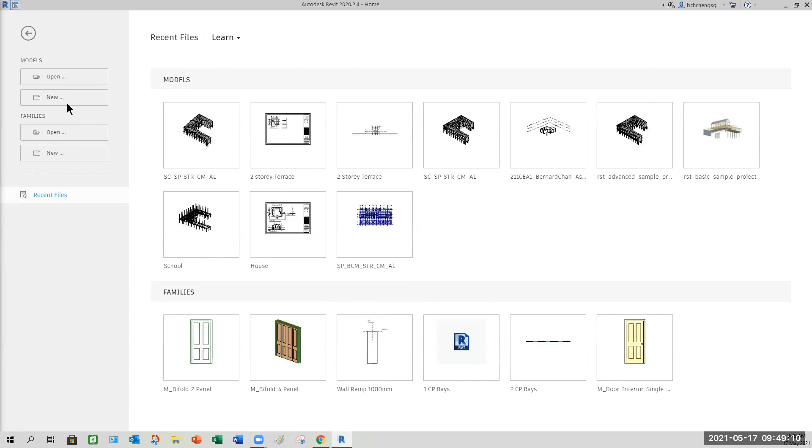So let me minimize here. I will open up our session, which is where is our file? Oh, I haven't used my notebook before, that was in school. Okay, so open. So my document should be your class session, BC Academy.

Students. HVAC, right? Yeah, so mechanical, HVAC, this one. Remember, this is all your backup files.

So if not required, try to delete away to free up occupied space. You guys can actually configure to leave like one or two backups, or set it to one. I'll show you later on.

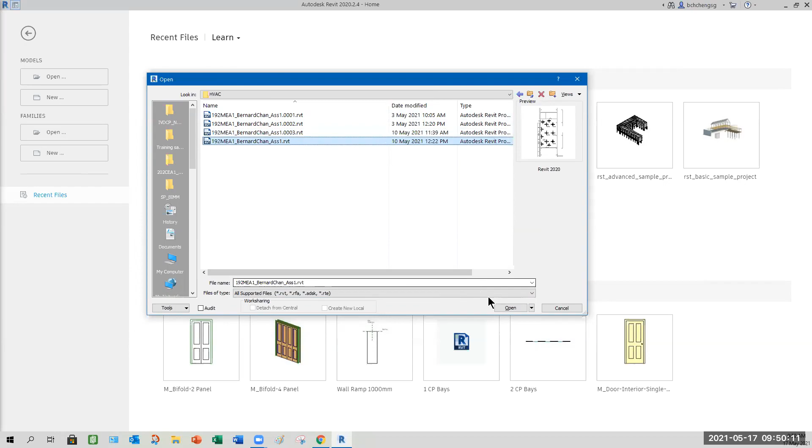Because on school PC, once you set it, when you go away, you still got to reconfigure it. A bit troublesome. Now you guys are using your laptop, so maybe I just do a quick revision on how you can configure Revit on your laptop.

A quick one, add the option here. Since we are using laptop, no need to set all those reminders, you can turn them off if you guys still remember. Then your worksharing update frequency, from more frequent set it to less, that means manual. So at least your Revit will perform faster.

Next, your view option. Remember, since we are doing mechanical now, your view discipline I will change to mechanical. Always remember that, right?

User interface - if you're still not used to the function, in a sense that you're not sure where's the location, you may want to change the tooltip assistant to high, so that at least the response is a bit faster for Revit.

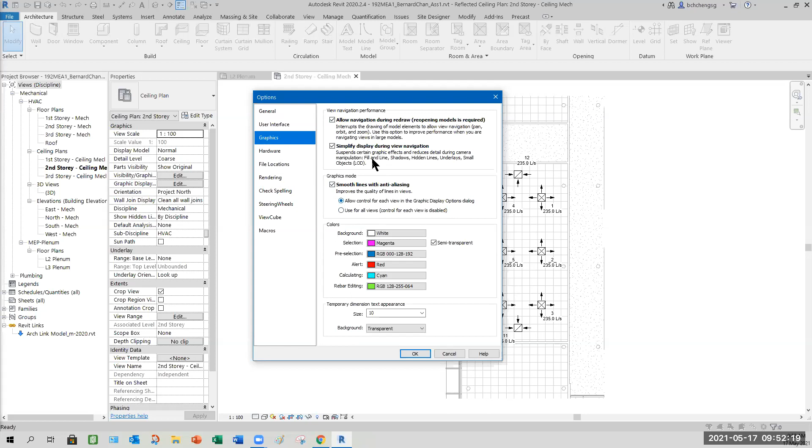So far, graphics portion here, you can change the color, which is this part. As I always like to use when I select an object, this is magenta color, and for pre-selection, you may want to change something, maybe this blue is the same. Okay, this blue, let's say I want it.

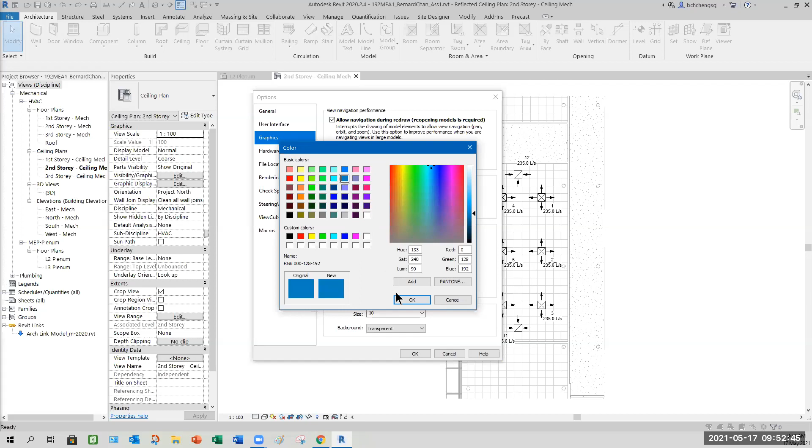The rest, these two are for rebar, which is structural, you don't need it, so don't care. Your temporary dimension, set it to 10 will do. Hardware is the graphic card area, so don't bother.

Now, file location - I believe you have all your libraries required, right? If you guys don't have, I can upload to the Google Classroom, then you guys can download. At least we have a communication platform over there, which is good for Zoom class.

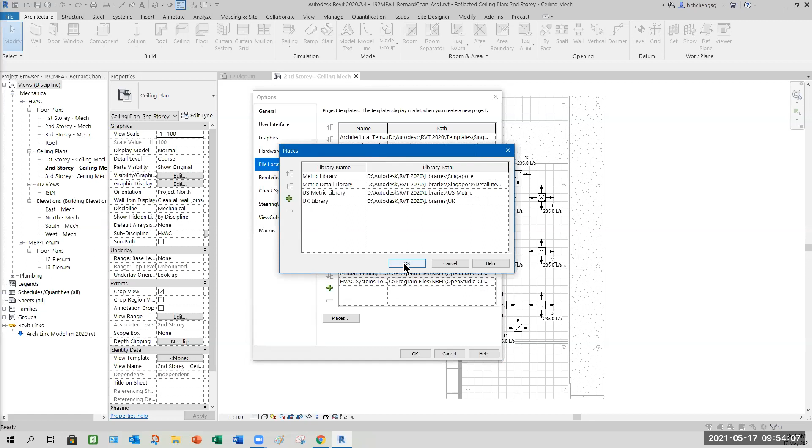So far, so good. Okay, so at least we have a proper setup. Then we can start.

Last lesson, where did we stop? I think we have finished this area, right? Which is the next one, the plenum level, L2.

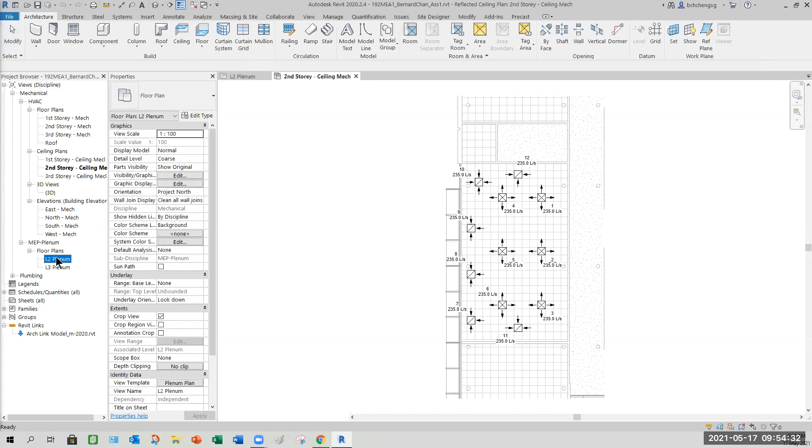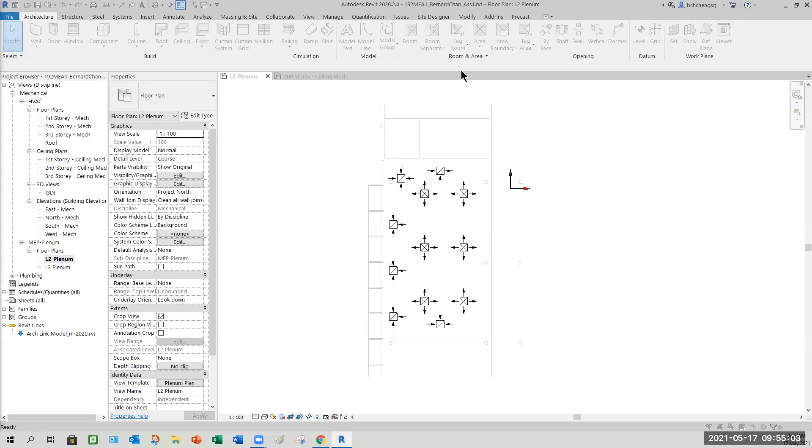So you can see 2020 has this thing on. This is actually known as the internal origin to origin. You guys can turn it off — I don't know why it's on, very weird. Maybe because in my lessons I turn it on and off quite often, so could be because of that. Okay, this one is under the side.

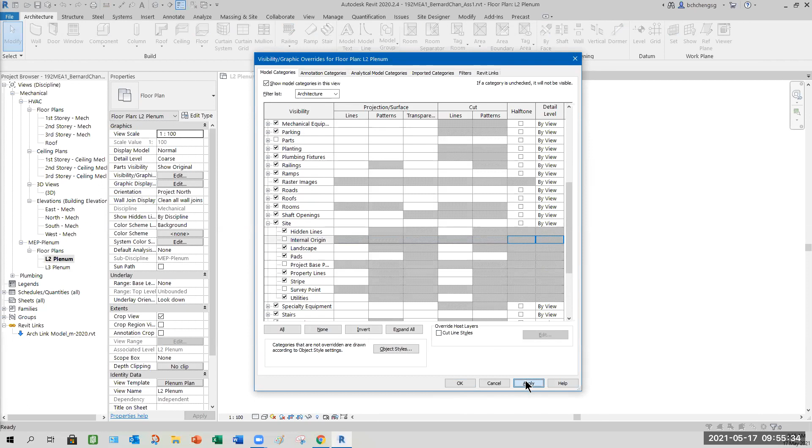Okay, before we start, I just want to double check all pins. Good, they are pinned. Okay.

Next thing I would like to add is a section view of our component here at plenum level. So how are we going to add the section tool? It's here — section. Or you can go to the View tab and look for section.

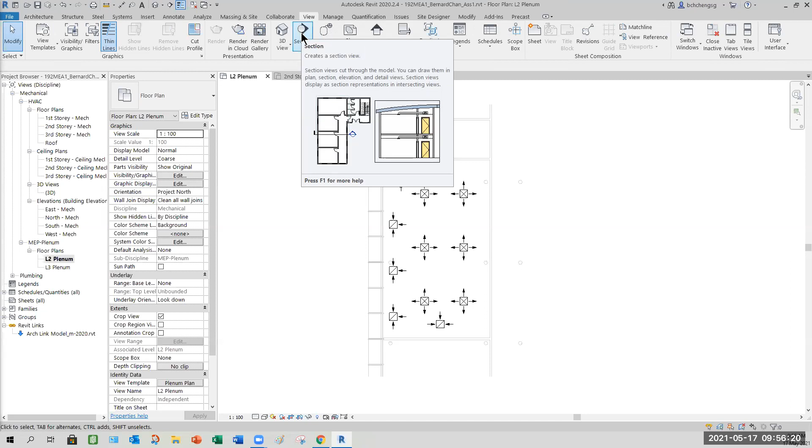The purpose of having a section is to check when I later add in the AHU, the air handling unit, or as you call it in school, the fan coil system, or fan handling unit.

I don't want it to sit on the ground — it's supposed to be mounted on the ceiling. But because when we insert it, it's actually sitting on the plenum level.

So from there we can do some measurement and set this distance. What happened to my throat, it keeps disturbing me. Okay, so — section.

So look carefully, select from not outside — outside you see the facade — it's somewhere inside here. Now pick a point.

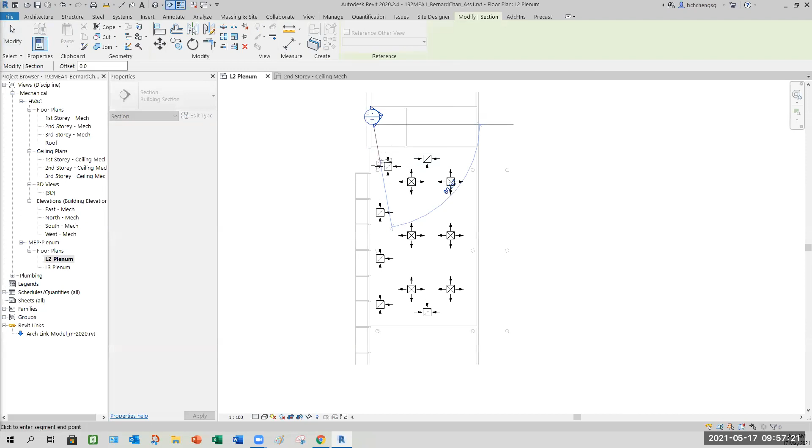You drag downward like this. Then you adjust the width of your cutting view, and also the clipping depth.

The depth here — not outside, but inside, closest to the wall. So it should look like this. Can you see?

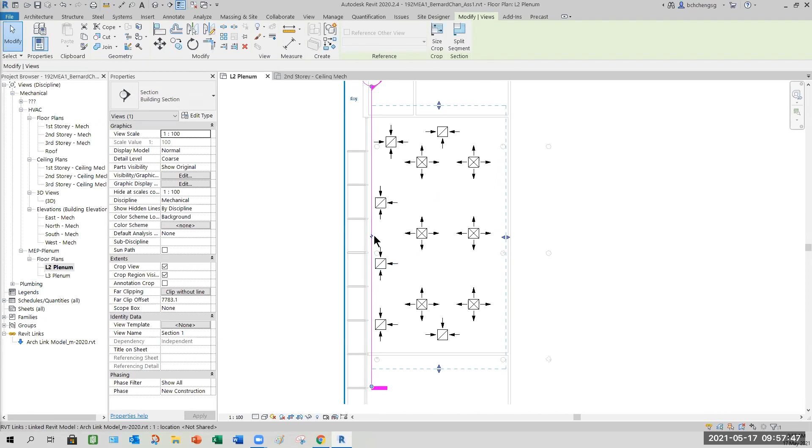If you feel that this line is too long and blocking you, worried it looks like some foreign object, turn it off — you can drag this shorter, so at least it looks cleaner that way. Like that, can?

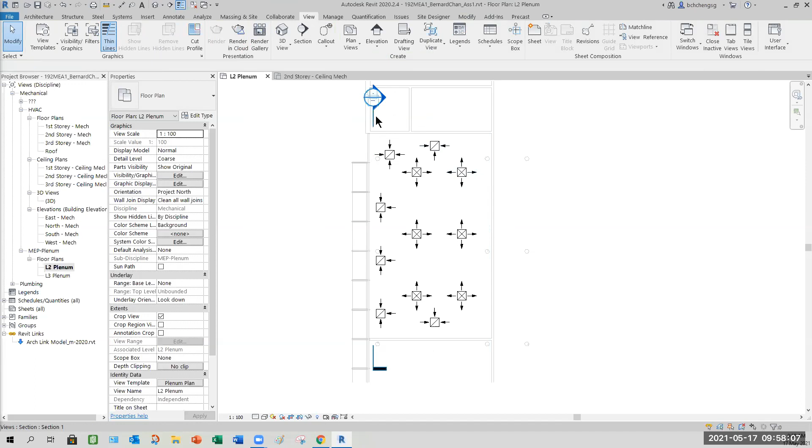I think I'll turn off my light here — it's very warm.

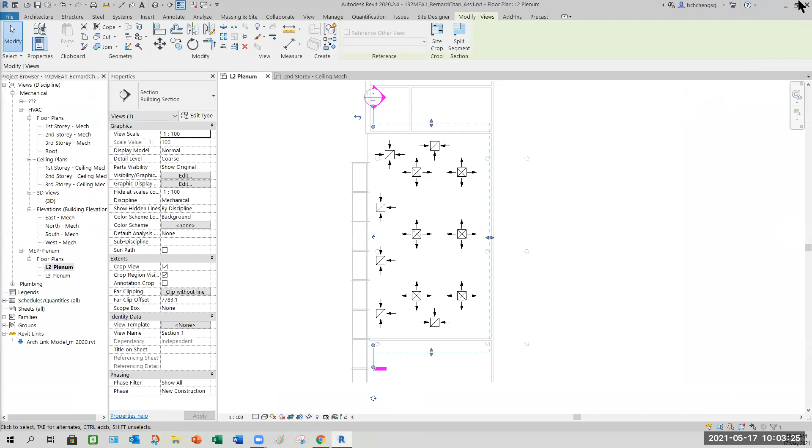Okay, let me minimize my screen. When you guys install software, I believe in Revit here — give me a minute, let me get my things out. You should see this software, see it? It's called Autodesk Desktop.

Then there is something on the licensing and so on. Because right now I'm using 2020 and 2022.

So it only updates, or you can only see, the latest version. If not, normally there's something on the licensing issue that you need to update and repair.

So if yours is an original version, then it should not be an issue. I mean, sorry — not the original, the educational version. Then there's no big problem; otherwise there's a bit of an issue. Okay, yeah, so take note of that.

So maybe later you want to take a look into it and see how. Okay, yeah, let's go back here.

So remember, once we create the plan section view, you'll notice question marks appear — it looks like this, because the system doesn't know where to place your section view. So you need to change the sub-discipline.

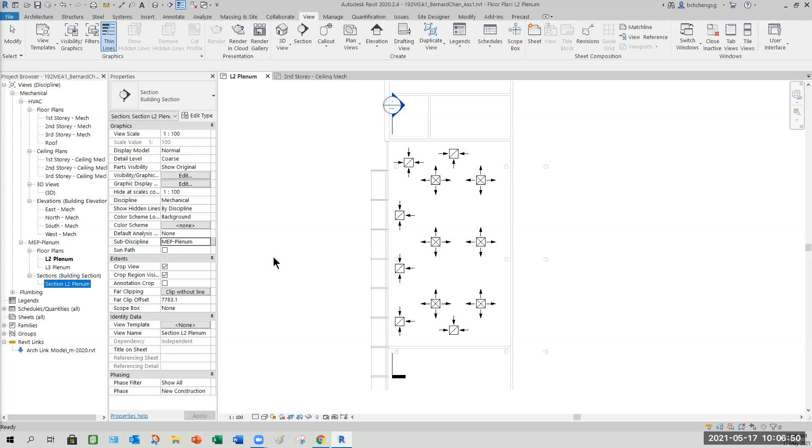How's it? How good? Yes, sir. Okay, so

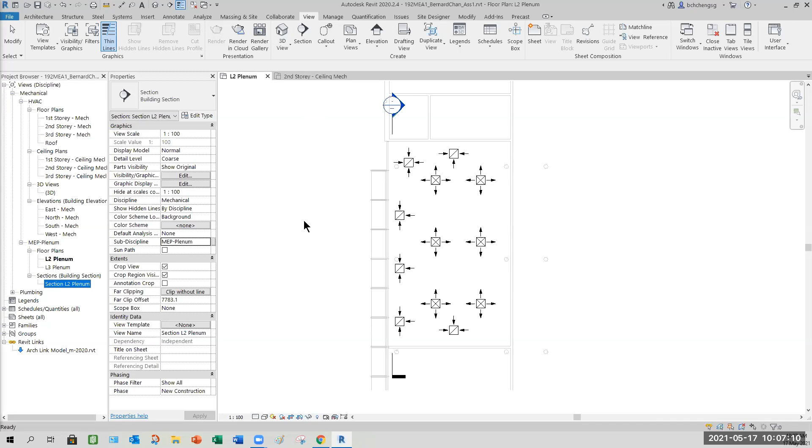The view here, after you have that, remember, section view. There's 3 different ways to open up your section view. First, you can double click at the view name itself. It will launch like this. This is how it will look like.

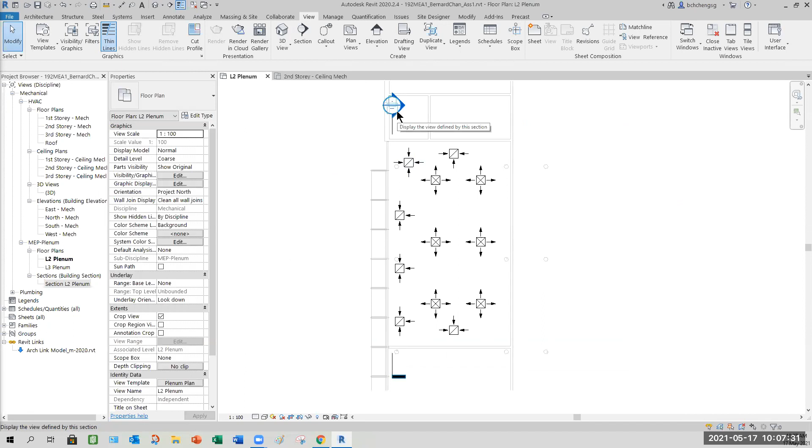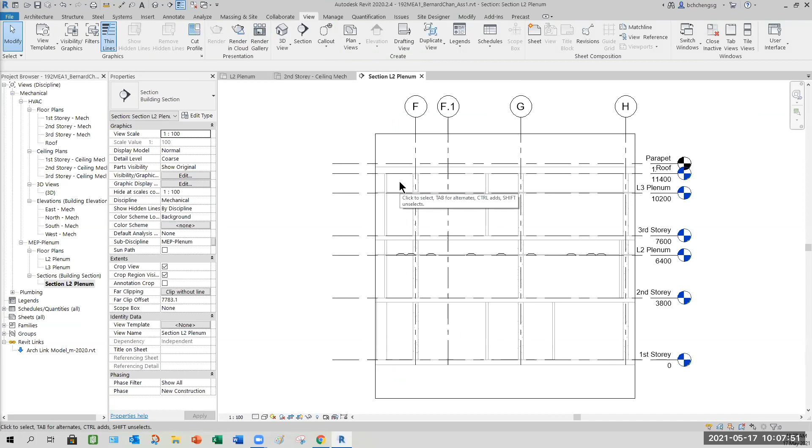Second, you can point at the bubble tag here, double click, and it will launch. The third, you select the line section, right click, and say go to view. Then it opens up. So these are the 3 different ways to go into your section view.

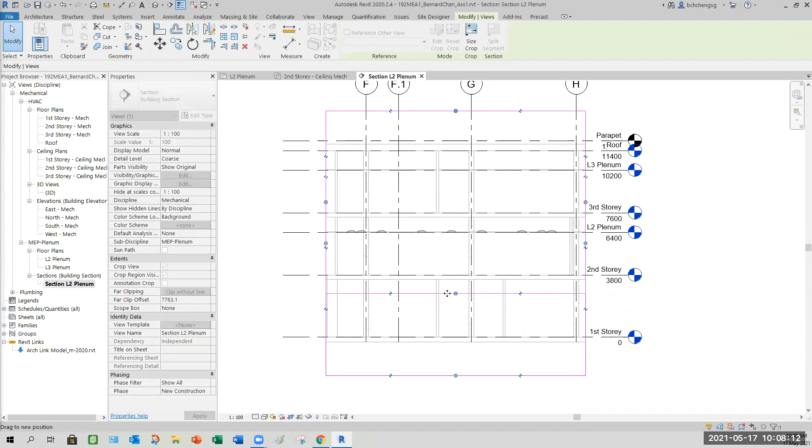Now, since we are here and we are doing only on level 2, you may want to adjust your view to see only level 2 like that. And of course, a lot of things will appear which you may want to hide, for instance, the grid line and your level. So if I go to VG, temporarily I don't want to see them - that means your own grid line and the link Archi grid line and level.

You can simply go to annotation category, then you turn off the view - grids and level, these 2.

Can? Can, sir. Vina, okay. Kairu, you guys are a bit too quiet. Yes, sir. Hopefully can catch up.

Actually, on Zoom you feel like it's more personal teaching because you guys are looking at my screen straight away. Yeah, not like in school face to face, you're looking at the projector. Agree? Yep.

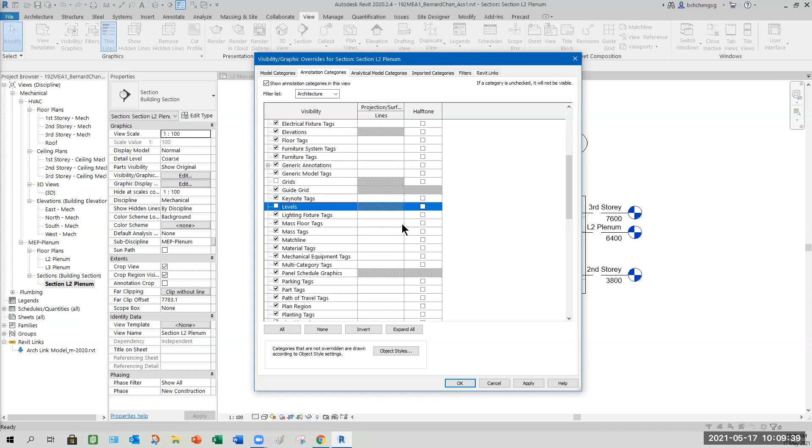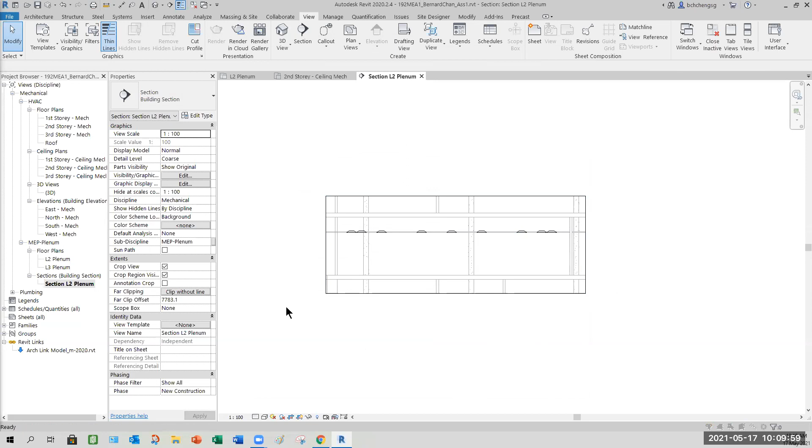Apply. Okay, you see that? Disappear. But of course, without the level, looks confusing. So maybe level I will still turn on - looks quite weird, no grid is still okay, but no level is a bit funny. Let me enable my level back.

Yeah, like this. Okay, but I will drag it outside. See, there's 2 sets - that's what I hate.

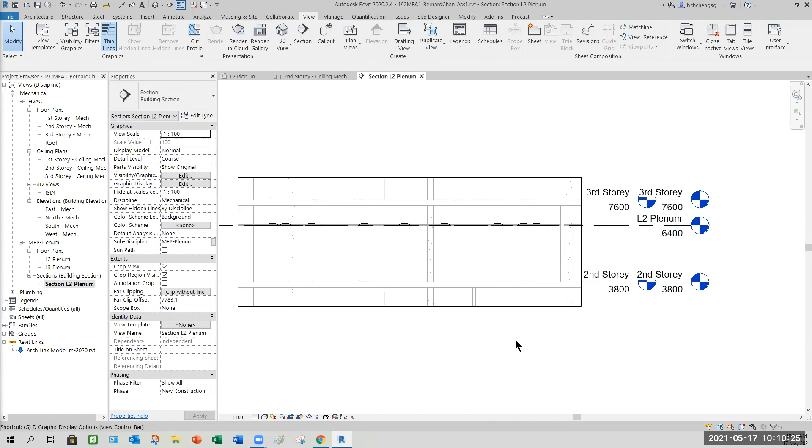VG. What's happening? Link Revit, Link Revit, half tone. This step you guys should know, by host view. Then you configure as per normal. All right.

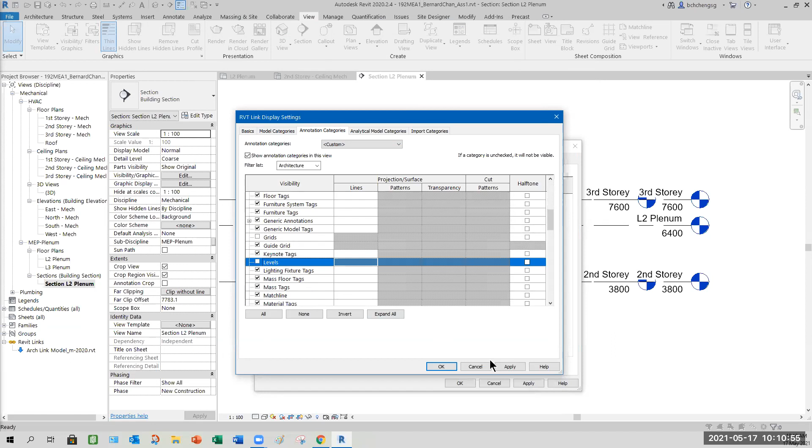Check on to custom, annotation category, custom, then grids and level off it. Yeah, so you should see only your level. All right.

So far, so good. So you can repeat the step, it's okay, under template or the VG. I go VG, view template, because I never apply. Unless you have a lot of plenum level, so-called a lot of plenum view to adjust, then ideally you should use a view template. If not, just VG will do.

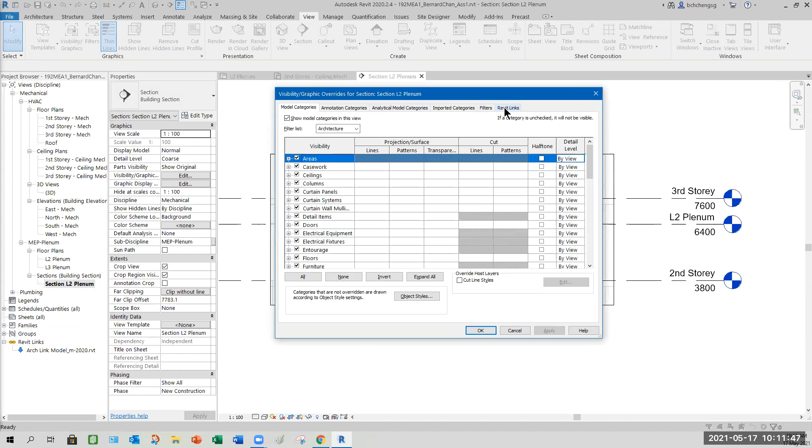Then you go to Revit link, okay, this one - under the visibility graphics override, you see here, there's a display custom.

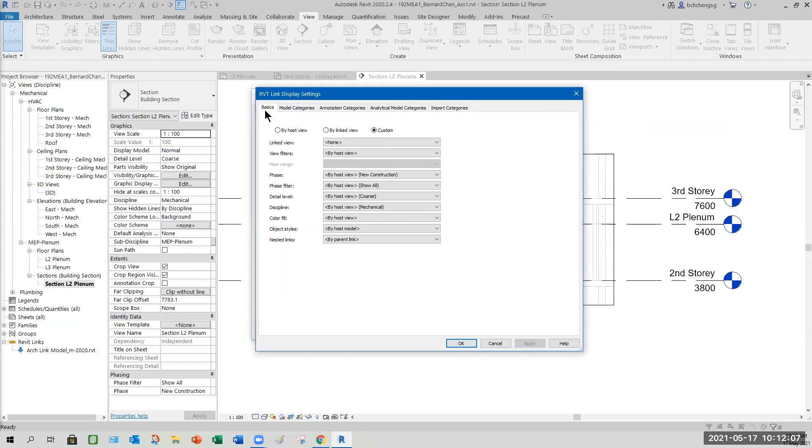So from here, you select custom under the basic tab. After that, annotation category - make sure it's custom, because if you don't set to custom, you can't make any changes. So custom, you scroll down, uncheck the grid and level.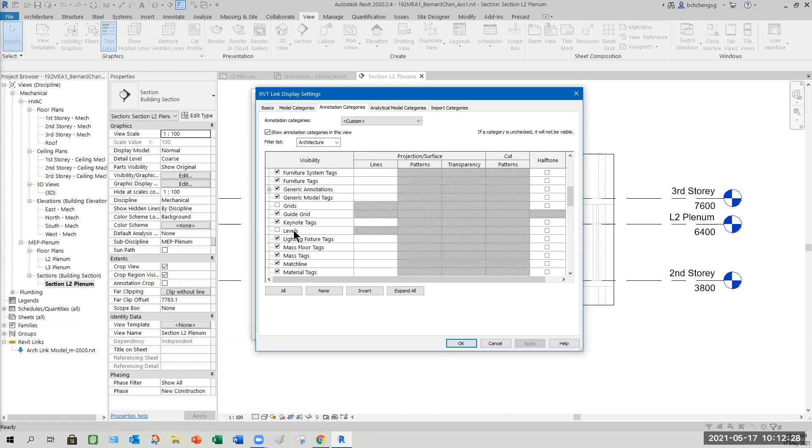Okay. Can. Yeah, so just okay, apply, okay, and it's clear.

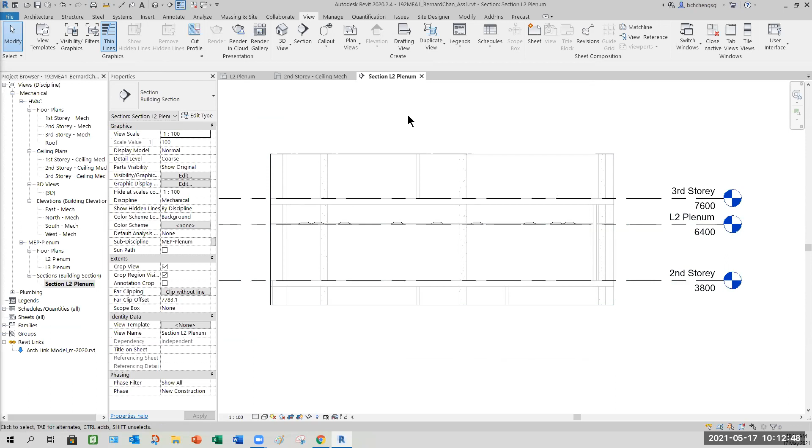Alright, after that, you type WT - that means my tile view is on. See that? Now, why am I turning this on? Don't worry, just to explain to you.

By right, we need not turn on the ceiling, but later, whatever you draw - your ducting, your mechanical equipment - you'll notice that your ceiling view will appear. So we need to hide them.

Okay, so meantime, I'll just close first. So WT, make sure that you have two views like this while you're working. Okay. Can, level 2.

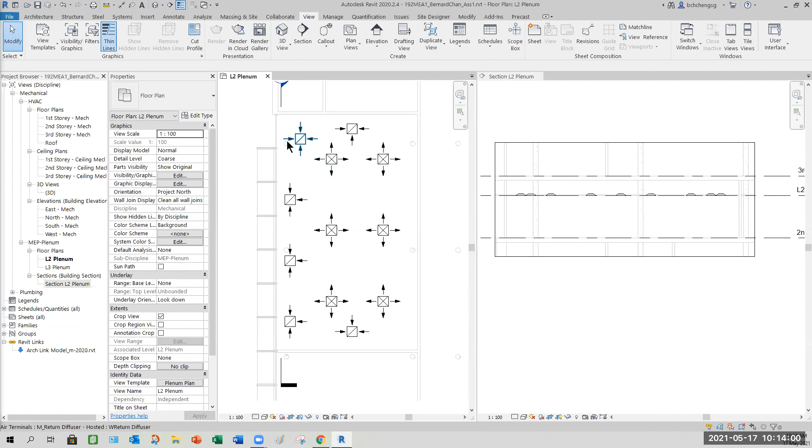Okay, now first thing, in order to create your ducting, right, of course you go to the system tab. This is where your HVAC tools are here - everything. All right, duct - of course, you have a size in mind, you design, you activate the command.

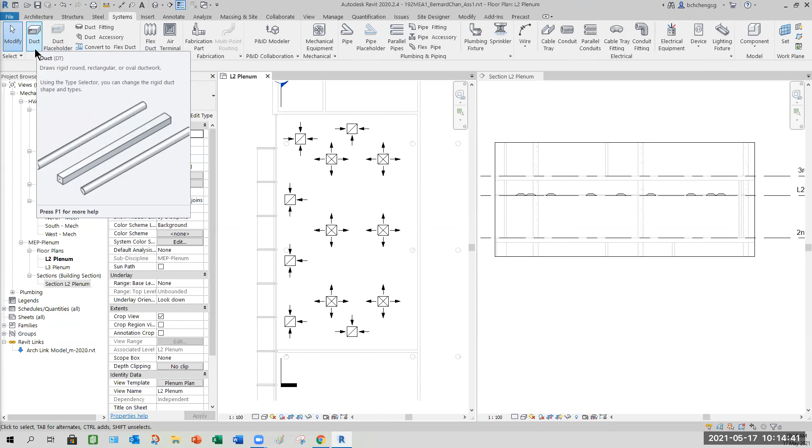But because you are all new, so am I, things are unsure yet. So we just need to, based on system, help us to design. Because all this in the real world, the experience that counts. Placeholder is for engineer to quickly do the connection - that means based on single line for calculation and design purposes.

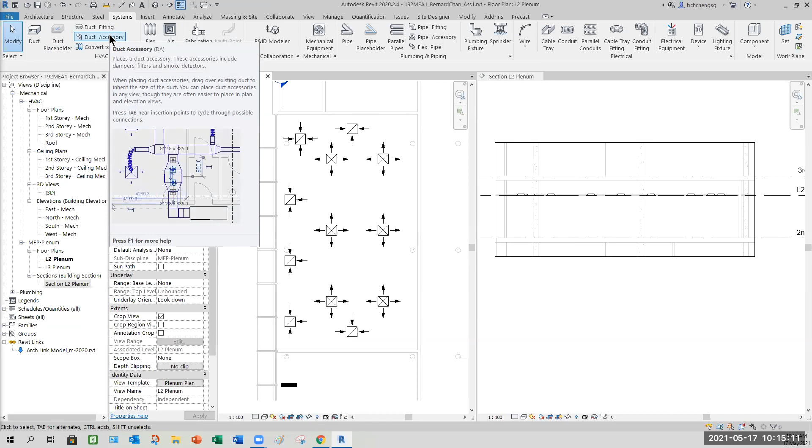Duct fitting is to add all your connecting parts. Duct accessories is to add in the equipment, like the gate valve, when you need the air pump, all those equipment. That's why I call it duct accessories.

Convert to flex duct means the fixed duct, you convert it if there's an obstruction. This one you straight away draw as flex duct. This air terminal, that day we did it.

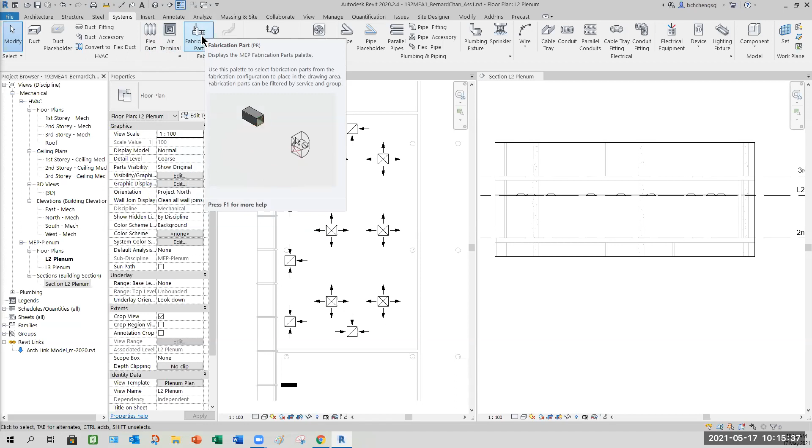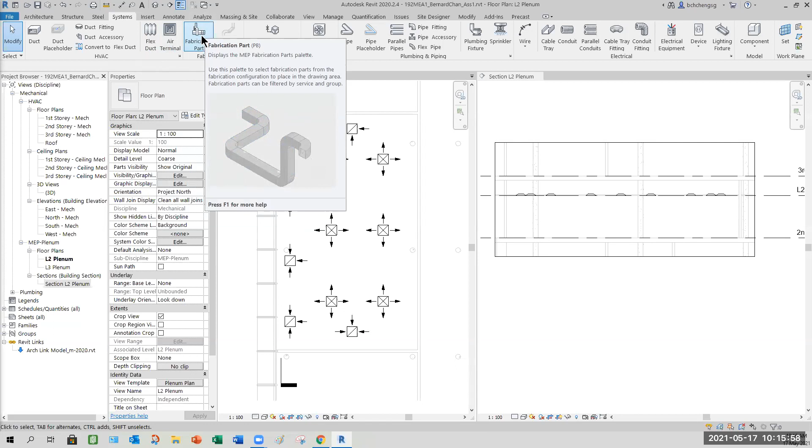Fabrication basically means converting your ducting into parts. You can see there's a lot of hollow sections. Currently our design is all solid components, so only the duct sizing and design is fixed. Then you can create them as fabrication parts, meaning produce at your company factory, then send to site to install.

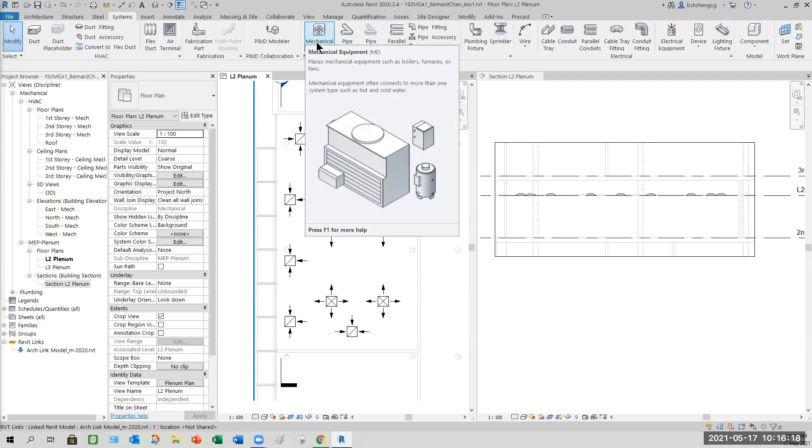This is for P&ID, which does oil and gas piping. We're not going to use this here. The mechanical category is where all your mechanical equipment is, like your AHU and so on. For this assignment or tutorial, we can't use any of the existing ones yet because the equipment is a lot bigger than our current one.

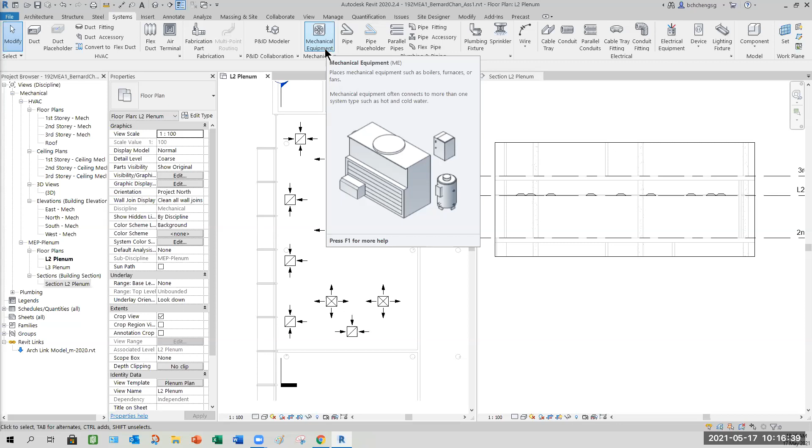Let me check the web page here. I think I did upload 2 families here, if I'm not wrong. Take a look. It's called... let me see... Families for MEP tutorial and assignment. I want you guys to download these 2 mechanical equipment, which are your air handling units.

You select them one by one, then you simply download them to your download folder. Okay, once done.

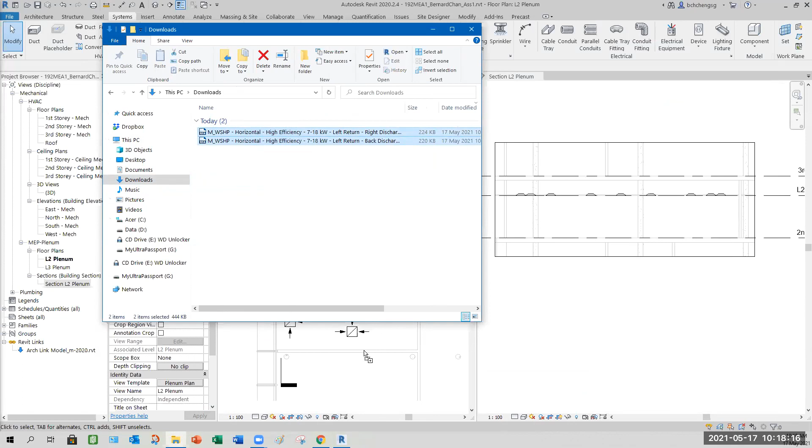So once done, how am I going to drag and drop here? No need to always go through mechanical equipment and so on. You may use your Windows Explorer like that. Let's say it's at my download folder. See here, right? You just simply select this or these 2, drag and drop, let go. See that? Now it's loading into your project.

You may want to know where it is. It's under Families at the project browser, mechanical equipment. You should see from here, now these are the 2.

All good? Yes sir. Okay, so I just want you to drag any one first into here so you can see whether the orientation is suitable. Select any one, select, drag. Sorry, inside one. You see they have different supply for that.

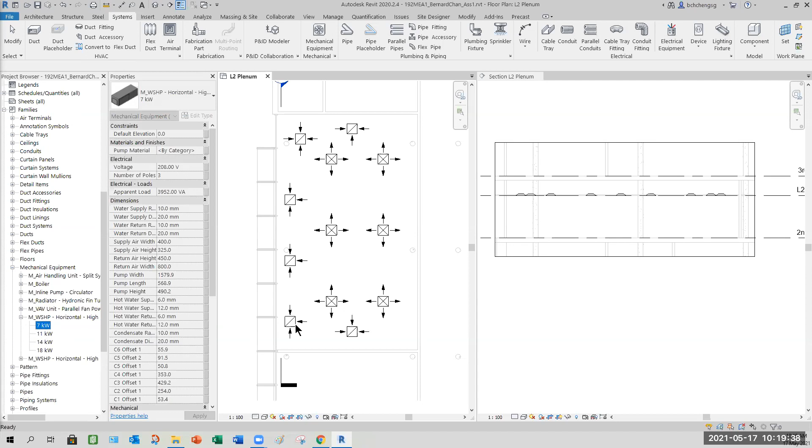So we choose the smaller one first. What's the difference between this? Of course, the higher the kilowatt means the open space is larger, so it can supply more. Meaning sometimes if we share with different rooms, they might install only 1 unit and share it. But here, as I said, we are not doing the actual site kind of calculations and modeling, so we choose the smaller one.

Okay, so select 7 kilowatt, drag and drop, let go. You see that it's coming in like this. So you place it randomly anywhere first, then you click escape, modify.

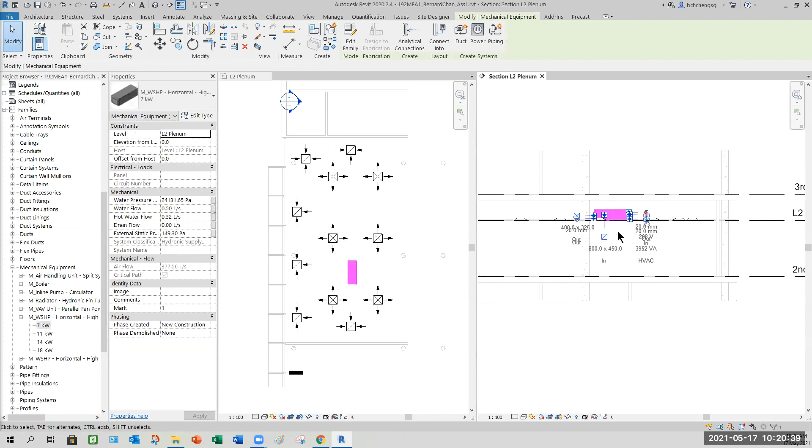So you notice my screen, what happened? Your AHU sits directly on the screen, I mean on the plenum level, which is no way this thing should happen. All right, so zoom in. You need to adjust it to a certain height, which is somewhere here, because more or less you need to have some clearance, like maybe 50mm, that's enough really.

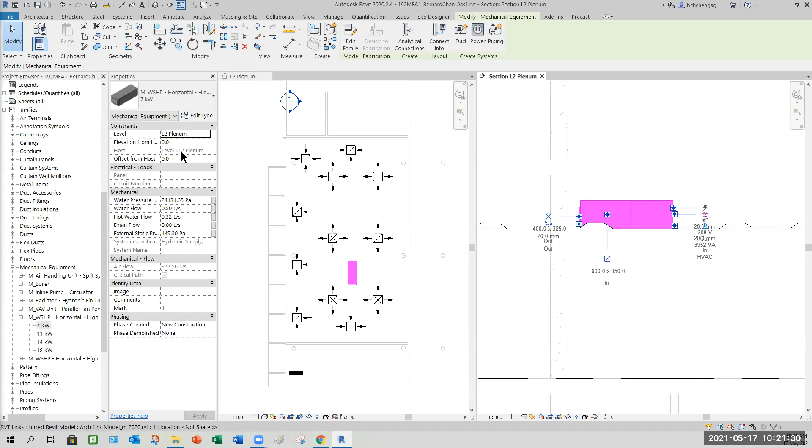So when you highlight the AHU, you can see from your properties palette it says offset from host. That's one thing, but the important one is elevation from level. It means we have a plenum level, this one is how far from here. So let's say we try 350, it should move up.

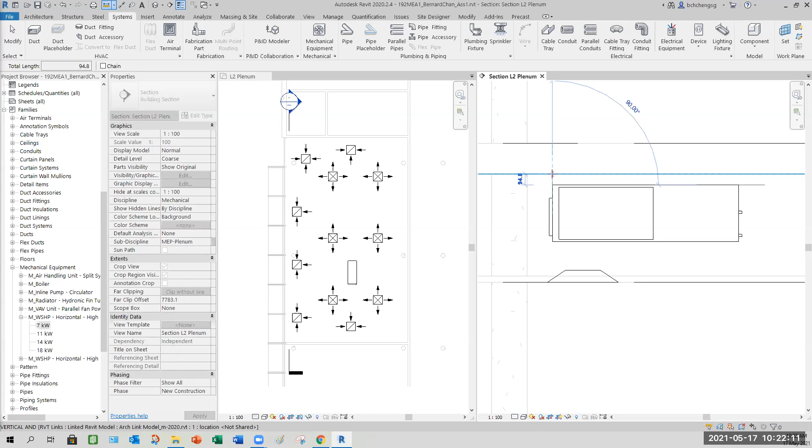350. What is my space here now? Let's do a quick measure. Okay, we have around 94.8, that means almost 100mm, which is good. All right, it's more than enough, unless you still want to squeeze further. That is provided by the condition required. Meantime we leave it at 100... I'm sorry, 94. Okay.

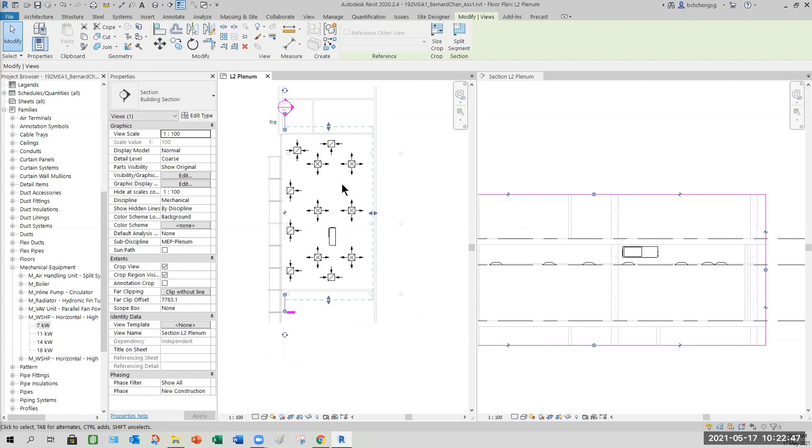So your view currently looks like this. If you can't see this in your view, then choose your section line. You see the section line, there's a flipping option, so sometimes when this flips the other way around, you see nothing. See that? So don't be alarmed, just flip your section line and you should be able to see your section component there. So it should look like this.

Can. How about the rest? Aisha, Kairu, Vina, Santos, Benek, how is it? Yeah, done sir. Okay.

So can you repeat again, which one? This part, I'm not sure where. After I track, put inside already. After what? No, you look at my screen now. Okay, if your adjustment is like this, then it's all right. Oh okay sir, just follow my view. That's why I'm selecting it, because sometimes you select this guy too short, you can't see. But sir, if mine is not similar to yours, how to change? Again, your similar means what? Not similar, is this the section? This one same like the square, but the level 2 - you mean planar? This one, huh? No, the one that we put just now. Wait, you share screen? I see.

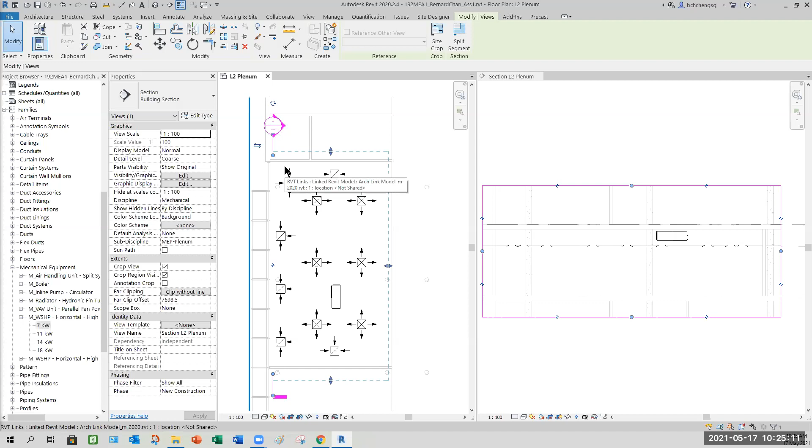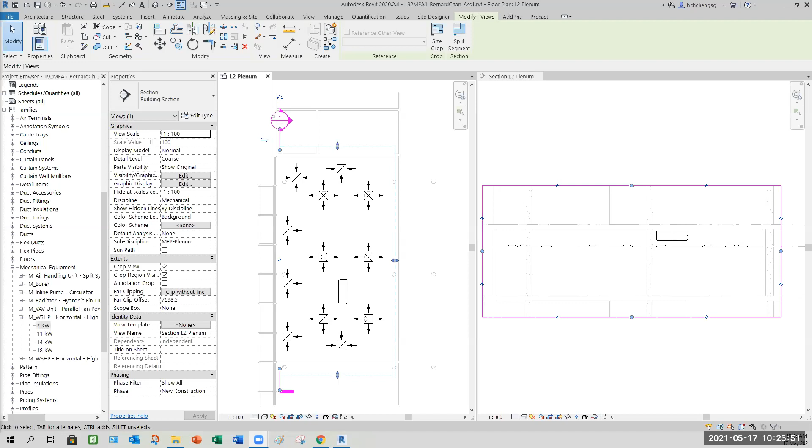Because you guys can share screen with me so I can see what you've done, if you're not sure. You must allow it. You mean I didn't allow you? Oh did I, seriously? Hold on, let me see. Normally it's allowed. They say you cannot start sharing while another participant is sharing. This kind of weird. Unless I stop sharing, then you can share. Let me stop first. Now can?

Okay, like mine is here, so I need to move it to the middle. Correct, so you just need to select the AHU, highlight the AHU.

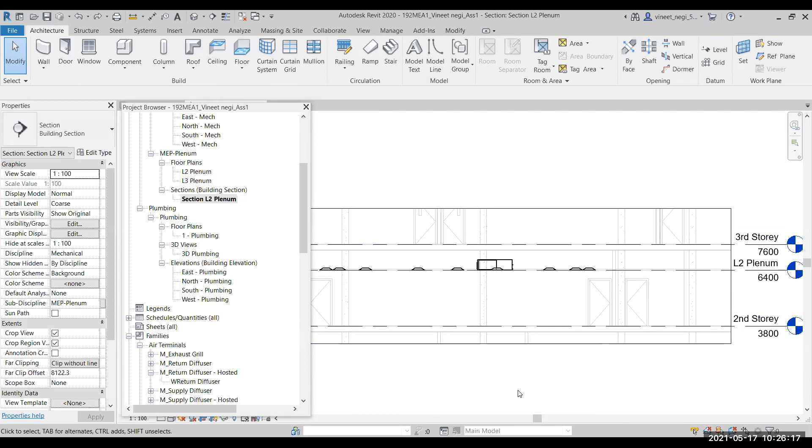Go to the elevation, the what do you call it, your properties palette. You see the elevation there on the screen? Elevation from level, no, the properties. This is your project browser. Cancel that, select your equipment first. See the elevation, yeah, elevation from level.

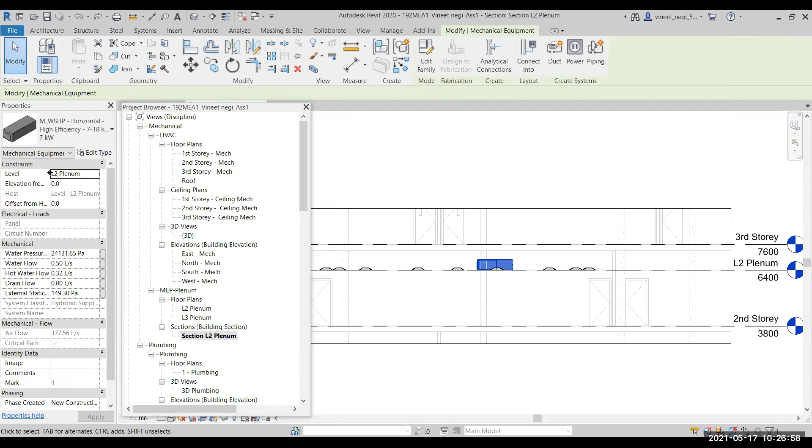No, the zero elevation value, from this one, this one, this one, this one. Oh okay sure, okay. Set it to 350. 350, enter. See, it moves up.

All right, thank you sir. No problem. Okay.

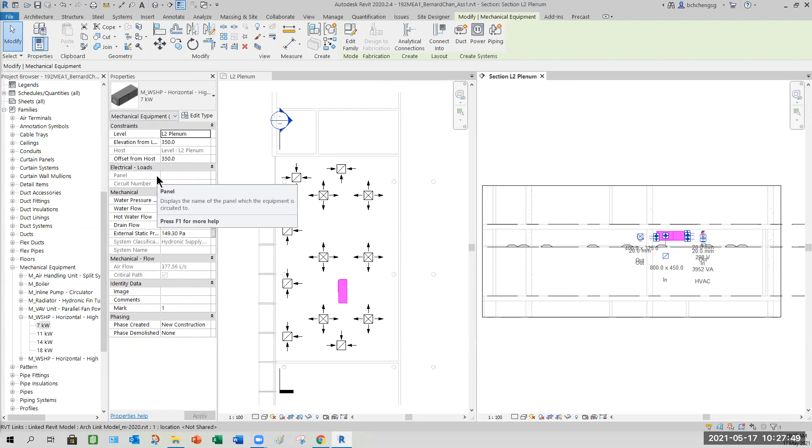So remember, in Revit, if you need to make any changes, you just select it, your equipment, then you'll see here all these information are always here, so just simply change it. Okay, now next step, what we need to do is, let me minimize first.

What we need to see is how you want to plan your connection. Let me zoom in a bit. By selecting or highlighting this AHU, you notice that here we have a cold water supply in, and return out is returned to the chiller. So 'in' means return, this is supply. So if you have this equipment this way, return is easy for connection, agree? But my supply won't be so good, because if the supply is out here, this is easy for connection, but this one here is not so direct. See or not?

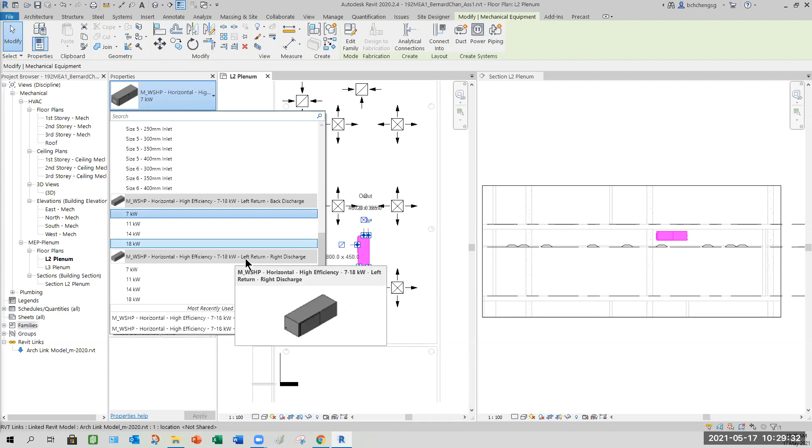You can see that the headroom we have is very tight. Okay, it's very tight, so this arrangement might not be the best. So let's look for another one. You highlight it, swap it with the other one. Just now I was using left return, back discharge. So if I select this one called left return, right discharge, highlight the 7 kilowatt, it's swapping now. So it's swapping, so if I'm looking at this, is it more directly out? See now?

That means same thing, this is the power, this is to supply and return. So here should be coil inside, so return - here should be a fan blow out. That's why one in, one out. It sucks here, blows out means supply. So this arrangement is good.

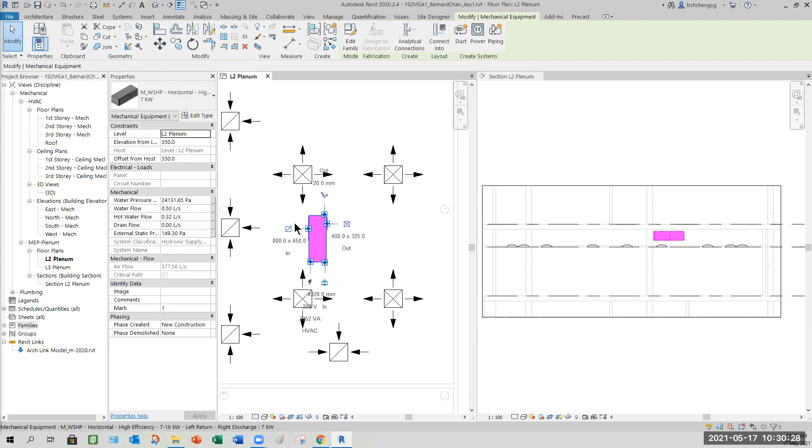Why? You see that if I move my mouse, the arrow, I can actually set it aside. See now, which is I can have a return duct and supply here, one strip. See, at least no reroute or pretty complex adjustment needed, not like just now that one - I got to go one big round to connect back here. So this is better than the earlier one.

Okay, so always remember, if you are doing design work, if your company tells you that you have a few mechanical equipment options that can actually be applied on this model, then you choose the one with the easy connection. When I say easy connection, what does that mean? As an aircon supplier, when there's too many turns, meaning what? There's a lot of disturbance or turbulence, because it blows, there's a block. See now, so when there's a block, it means turbulence. Turbulence will have sound - that's one thing. Subsequently it will slow down the flow, which is not so good. So eventually those ducting at further ends might not be able to get air. We got wind, but maybe not cold, because of some turbulence here. So design with less bending, less turns, is a better design.

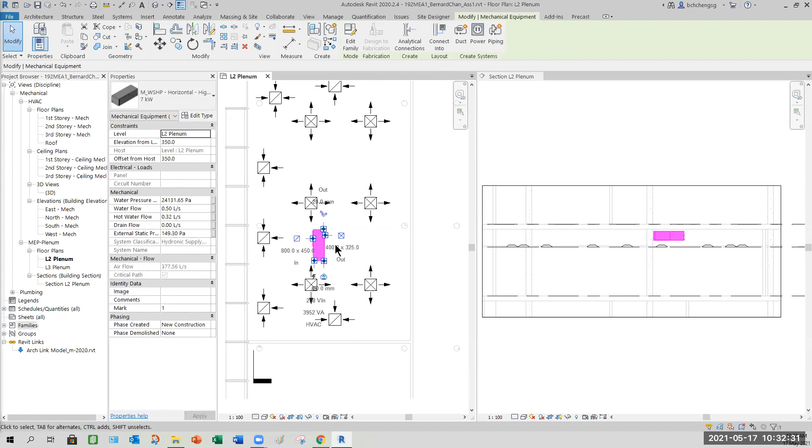Okay, so you can actually adjust this - not using your mouse, using your keyboard arrow up, down, left, right, all this. Okay, so I'll adjust something like this, somewhere like this. I can see when you move, it doesn't affect any of the height, it's only the movement at the level. Okay, all good.

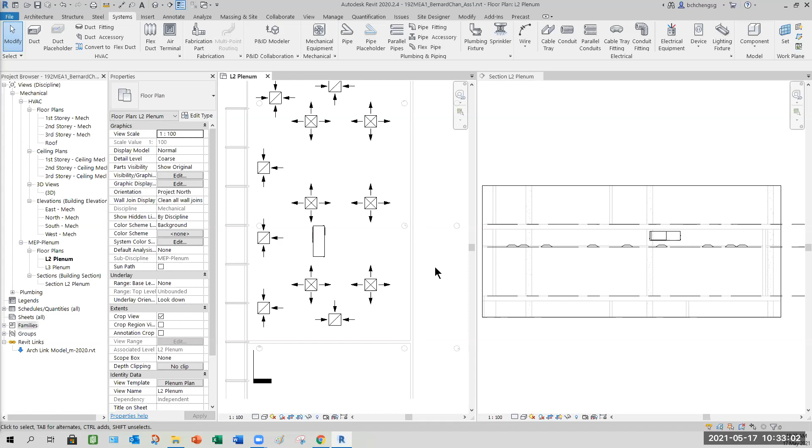Can, sir. Okay. If okay, I will use the default system from the command here. They will auto connect this as supply and the rest here connect as return. So how to do that? Ready? All of y'all? Yes.

Okay, select any of these supply ducts. Supply terminal, highlight one of them. And you notice that the contextual ribbon says create system, meaning the duct system or duct network. Select the command. You see something pop up like this. It says supply air, and it says mechanical supply.

So this name is a long name, you may want to change it, or manage the naming itself. So here I'll take away the mechanical. That means let's leave it as M mechanical supply air. No need to set the one.

Maybe it's on level 2. What is the name of the room? You may say this room is currently, I might not know what is the room. Any ideas how to check what is a room? Anyone? The drawing, the Aki. Correct, by right, to check from Aki. By left, there's a way.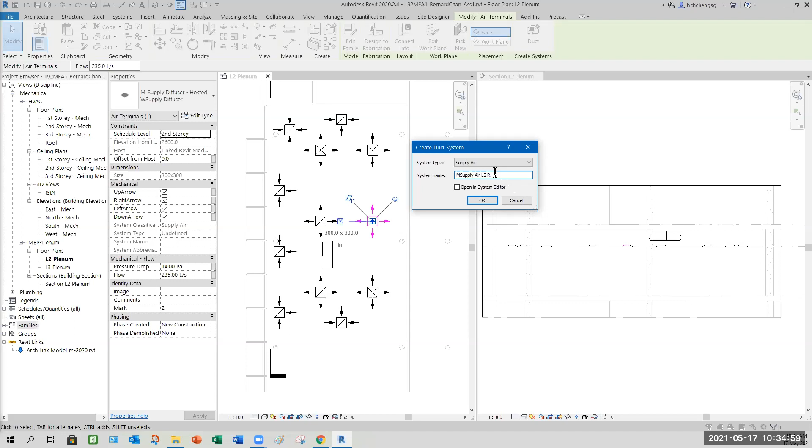Okay, so let me cancel first because I don't know what is the room for that. So I cancel. Okay, now we go to the second story plan of our mechanical. We open up. Okay, like this.

I still have my plenum level beside, because the marking we want to set is actually here. It's also a later part if we want to use for calculation the coolness. So this is the area we want to tag for space.

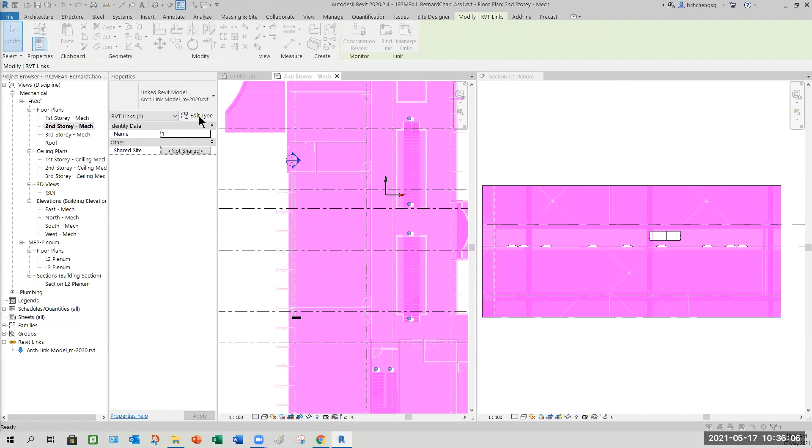Okay, ready? If ready, the first step is make sure you select your Archi model. Then you go to edit type. Why? You need to enable something from here, which is room bounding.

The purpose of room bounding basically is in future, if you need to do or perform a calculation. As I mentioned, the first or second lesson on this, which I say is a complex step, but meantime, I'll say that if we have time, I will show you. But since we need to know the room names and so on, it's ideally just tag them first. So this is the procedure. You need to enable room bounding if you want to do any later part for your project for the aircon calculations. Okay, everyone can get this?

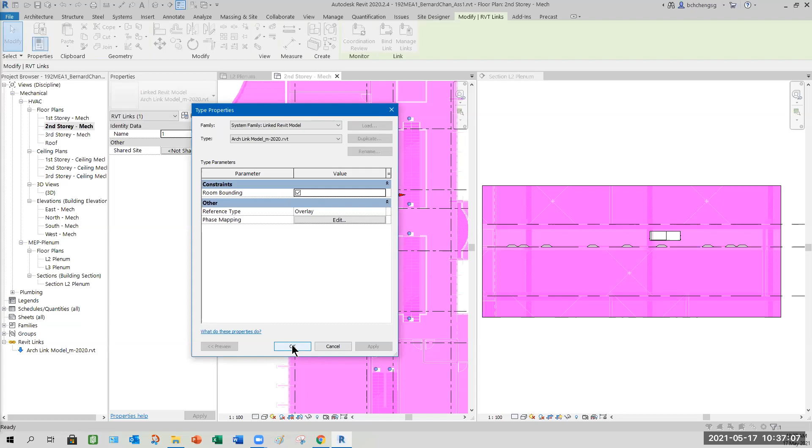Yes. Okay, apply and okay. Then clear your selection.

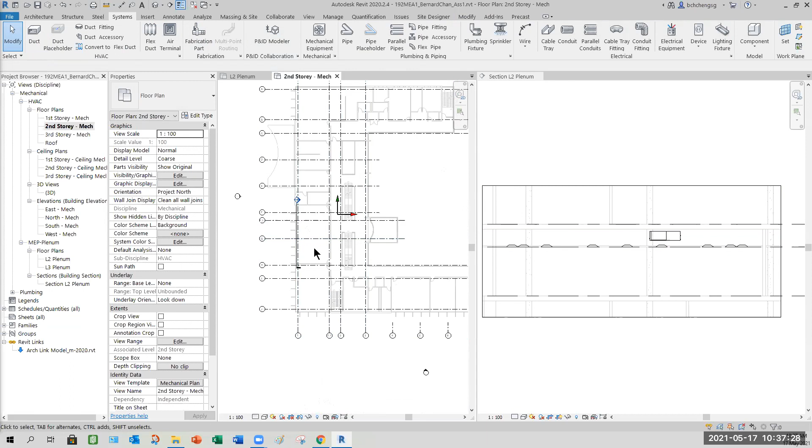Next step, you go to... can do that again, sorry, can do that again. You just need to highlight your Archi model. That means you move around, you see that your Archi model will see a frame. Select. Then you go to your properties palette, edit type, check on the room bounding. Edit type, room bounding, right?

Okay. Then clear your selection. Zoom in. Next step, you go to the Analyze tab. Look for the panel that says spaces and zones. In future, in your real work, you might need to do some space planning and your zoning. So you must know where to look for these tools.

Okay, now what we want to do is to tag the space for M&E. See that, how they do the tagging. Now select these space tools. Don't eager to tag, this is wrong. This is correct, but don't tag first because we have a range to adjust.

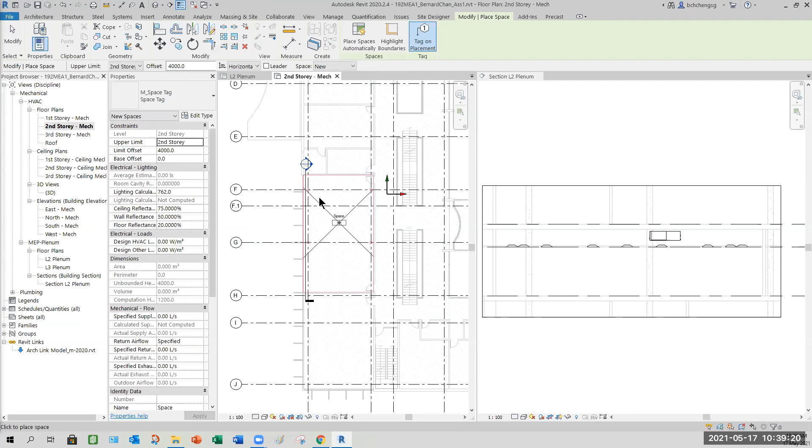Because as I say, this is your second story, the space calculations should snap at L2 plenum. So don't eager to snap first. You see here, currently we are at second story upper limit, not L2 plenum. You need to select L2 plenum, then your offset 0.

Okay, because you want to snap the space from level 2 until plenum. So currently my plan shows level 2, but my offset upper limit is L2 plenum and no further offset. So it will look like this. All good.

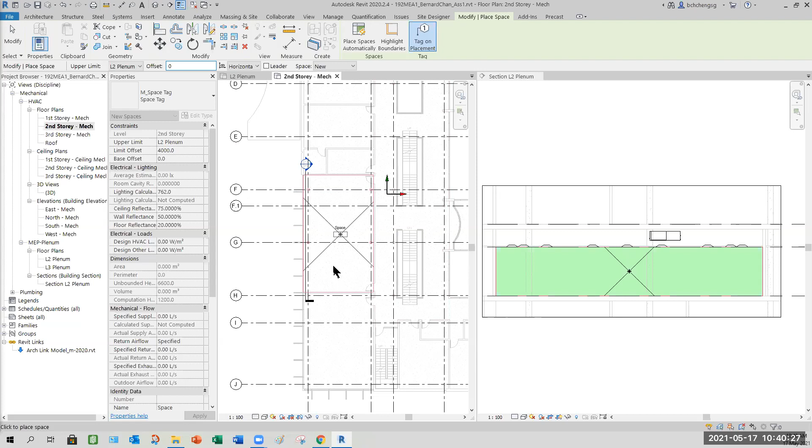If okay, you just click once. Don't click so many times. Then quickly modify, cancel away. You select, it appears. See the space that we tag?

Is that right? Yeah. Now sometimes when you clear your selection, you might say, hey, where is the space that I tagged? It disappears. It's still there, it's just that you don't see the color for that. So to some students it might feel very confusing, because when you tag, you might forget it's actually been tagged, then you tag the spacing again.

Of course, there's a marker here, the tagging, but it's easier by looking at the color, is easier. Okay, or another word you can remember. All right, easily. So how to set that kind of so-called color that you can see, just now we tagged the green color.

I'll show you. At this view, you type VG. Can VG work on here? Double check. If you go to the space, S-P-A-C-E, space. Okay, you can't see it means you got to enable mechanical or your MEP stuff. Yeah, then you'll be there. So scroll down, space. Now here, plus, you see this guy called interior?

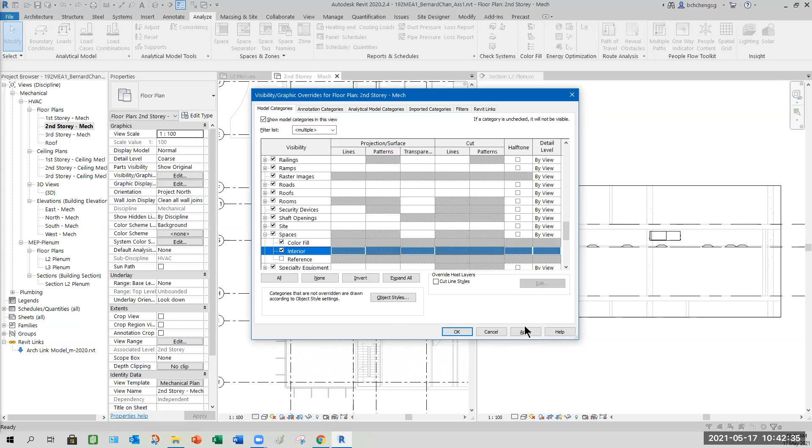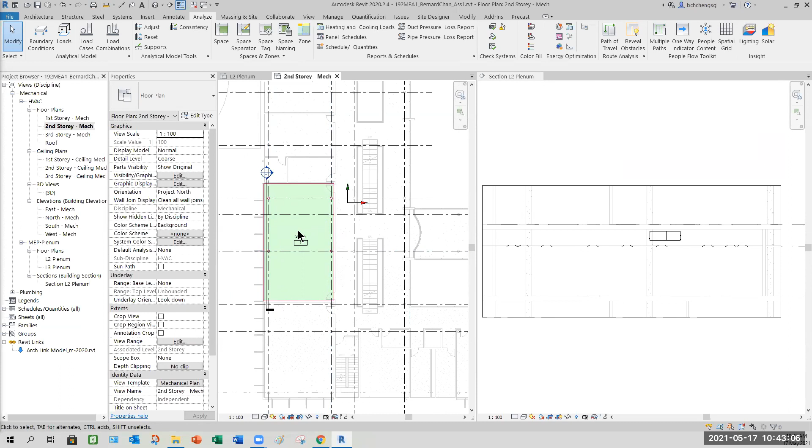Have or not? Have, check on the interior. Apply and okay, the color will show. So when you see that, it means you already tagged the space. At least not just to display the tagging space, but the color will tell you that you already done that. Because my worry is you might sometimes accidentally delete the tagging, but the space is still there.

So I can see from the color, it's easier that way. Okay, all good? Yes sir. So how do you know what this room is? You see that when you move your mouse here, this space keeps flashing. When you select correctly, click once. It means you are selecting the space.

You scroll down, you see here below under identity data, the number - room number 219, room name library. So you know this room tagging is at second story, number 19, so it's 219, and the room name is called library. So for MEP, if you can follow the same tagging as the ARCHI, that'll be good.

So I've got to change the number to 219, then for the space you type library. Okay, enter. Now the tag will show you it's called library 219. Any questions?

So you can do the previous step again, the tagging - okay, you just change the name. You need to select, you see the X, the big X. If you can't, it's very simple - point at the tagging, tap, use the tab key from your keyboard. You're able to select the space. So it's important to select the X, meaning the space.

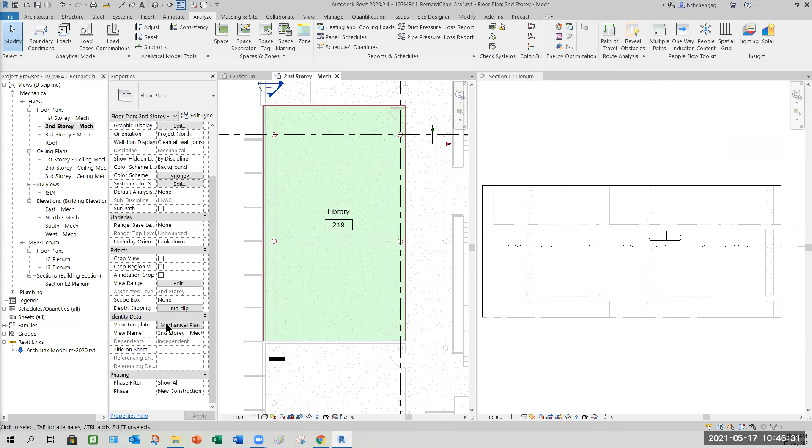If it still cannot, don't worry. As long as, let's say VG doesn't work, then you must come back to mechanical plan. Then from here, because you checked it, then you come here and turn on and change. All right, it's always the case like that.

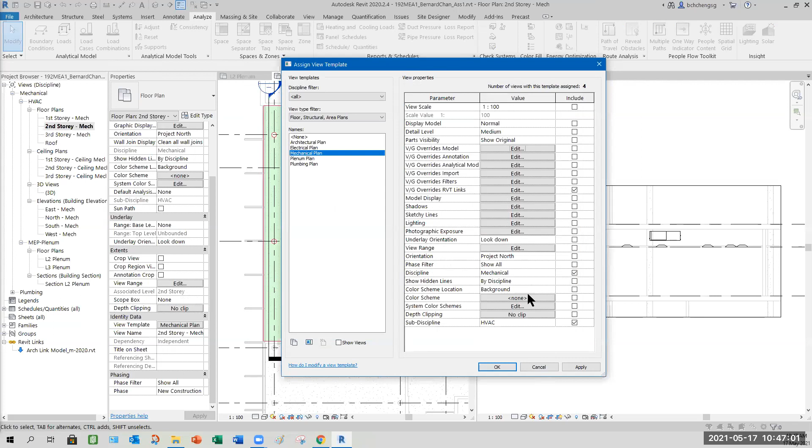So your visibility for the value should be somewhere - it says identity data, right? By right, it should be able to, but by left it's a bit weird. It should not say cannot, because here you're managing your view, not your actual physical component. So if you select the grid, see, there's no so-called view range here or view template. So you can see these two you can't change because they're linked to your ARCHI. This one is yours, so A should be able to change.

Wait, I'm trying. You cannot? Then share your screen with me, let me see. You should be able to change it. You guys can keep comparing my screen and your screen, then you'll be clear.

What happened? Cannot. We need to drop off. The phone, is it? Another laptop, restart.

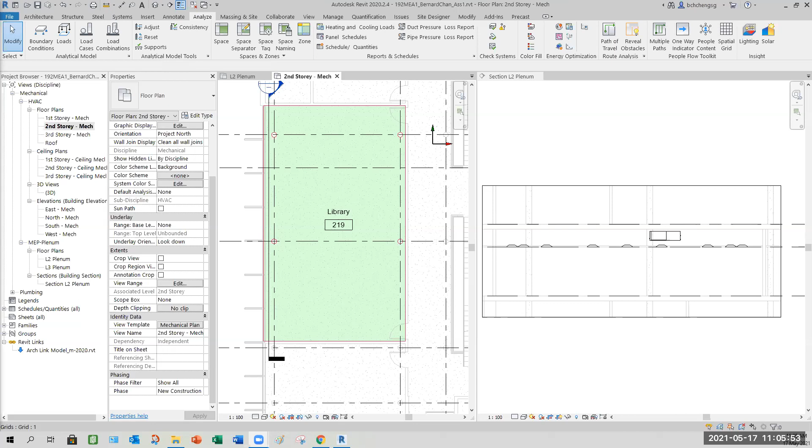Oops, I didn't stop recording. Oh my goodness, hold on.